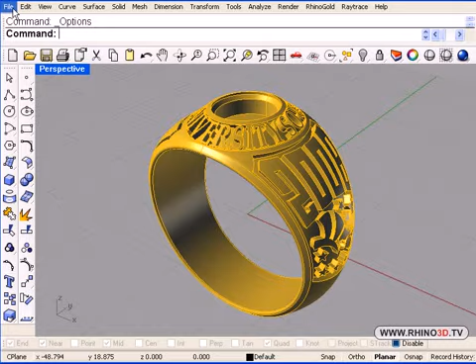Let's start a new document. Small objects, millimeters. Let's go now to Tools, Options, and set up our document with the right grid. We go to the grid option, make the grid 30 millimeters from the origin point. Minor grid lines are every 1 millimeter, major every 10 millimeters. And the snap spacing will be 0.5.

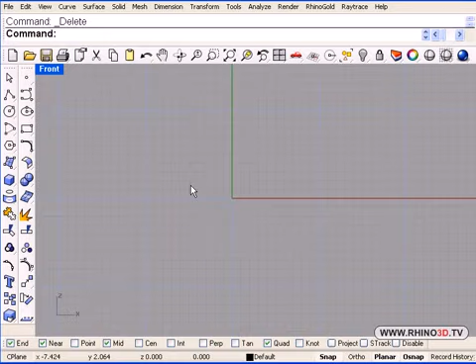Now let's go to the colors, change our major grid line to a color we can see better to define our space easier, like a light blue color. We click OK. And our grid is much easier to see now. Let's start the ring with a circle for the finger size. The circle is going to be 9 millimeters in radius.

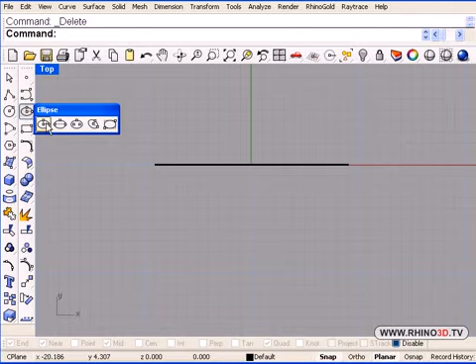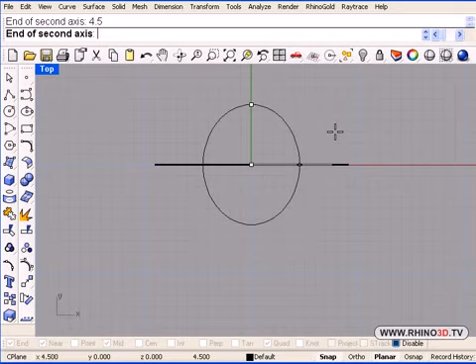Now from the top view, we're going to draw an ellipse, defining the stone shape. We'll make a 5.5 radius for the length and 4.5 radius for the width. Now let's go to the front view. In the front view, we will move this new stone shape ellipse to its correct placement.

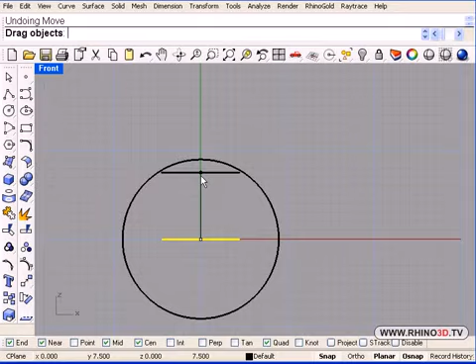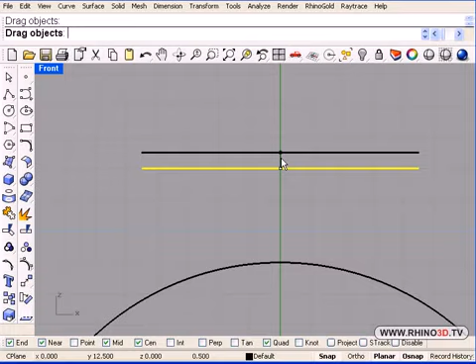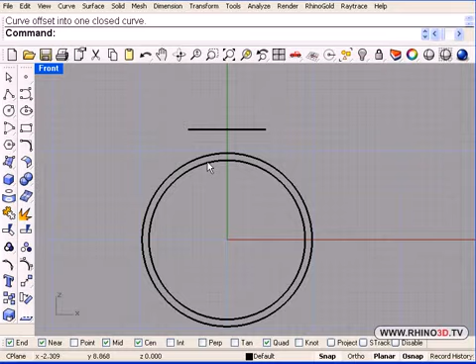Notice we're using the grid to get our measurement. Make sure to provide enough clearance for the lettering, which is probably going to be around 3 millimeters high. So you need to give yourself enough room. Move that a little higher. Now we'll take this circle, the finger size, and we're going to offset it at 0.8 millimeters. And I think we need more space here, so we'll move this up just a little bit more.

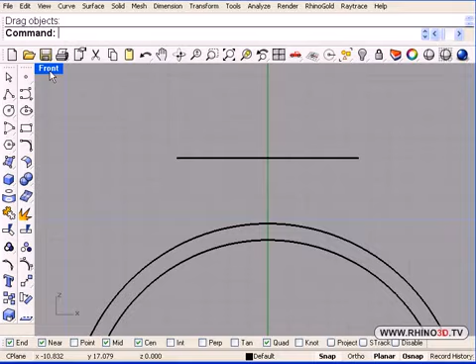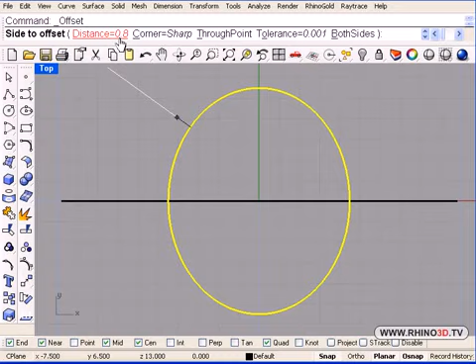We are now going to offset the ellipse to give ourselves a small rim around the stone. We're going to use 0.25 distance. We can hide this curve using our pop-up menu, hide. And we can also hide the finger size.

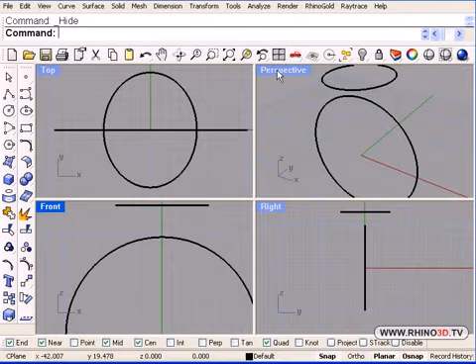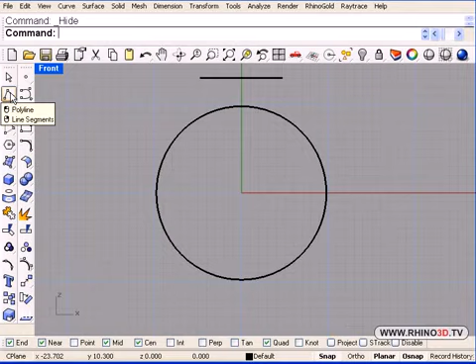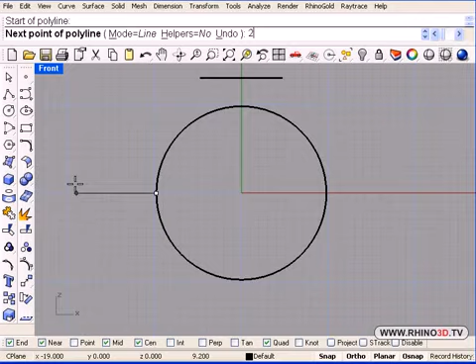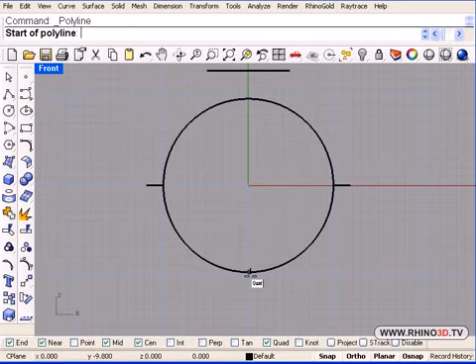Now we're going to begin to draw the shank. We'll give ourselves some guidelines from the quadrants of the circle. We'll go with 2 millimeters from the sides and 1.5 from the bottom. So using quadrant snap, we snap to this side. Make sure ortho is on. Make sure we're straight. And this is going to be 2 millimeters. We need to mirror. So we mirror that one over to the other side. So we got 2 millimeters on each side. And we place a 1.5 millimeter curve at the bottom quadrant.

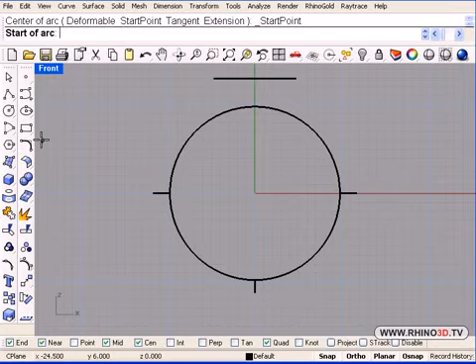Now we'll place an arc. Starts here, ends there, and point on arc right there. Notice the use of the endpoint object snap. These we don't need anymore. We'll get rid of them. So hit delete, select and delete.

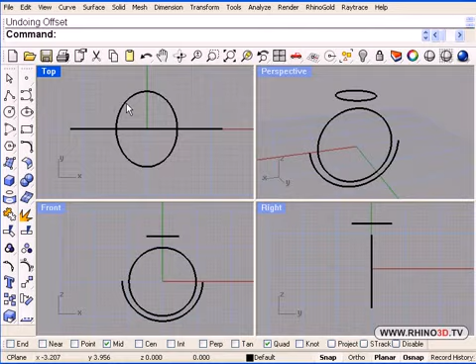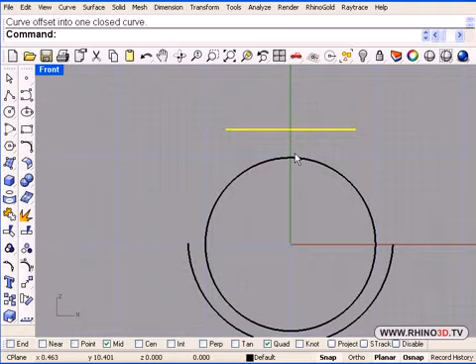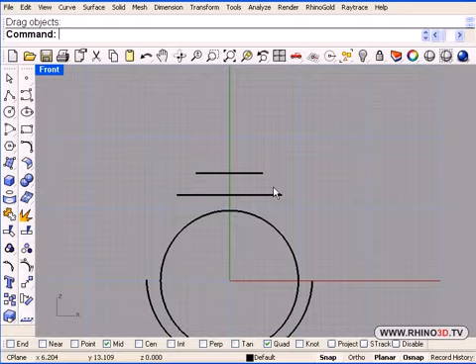Now we're going to create the outer rim of the head. So I offset at 2.75. And I'm giving myself a 2 millimeter space between the finger size circle and the bottom part of the head. Still giving myself enough room. And giving myself 3 millimeter space from the two parts of the head. Now that one, for now, we'll hide.

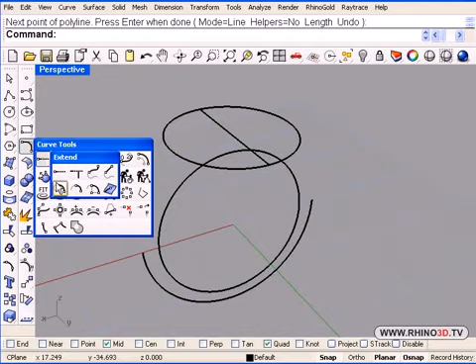I'm going to draw a straight line down the center line. Let's create a polyline from quadrant to quadrant across, snap the ellipse. And we proceed to extend by arc to point to the center midpoint. And we get rid of that line.

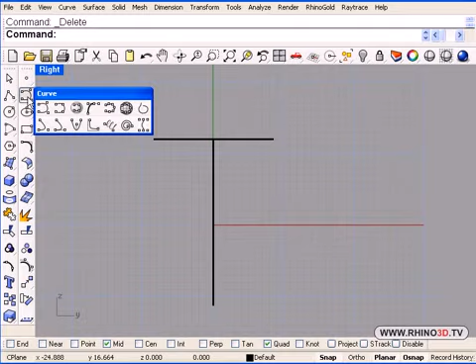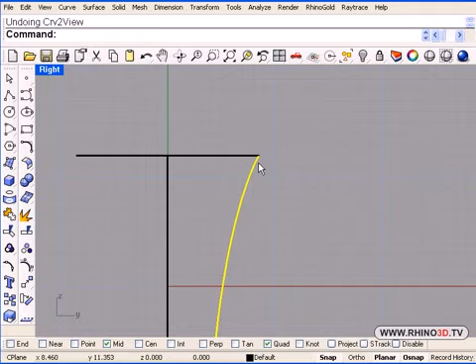Now using a conic, we're going to define the tapering of the shank of the ring. Notice we're in the right view. We need to extend this conic slightly so that it's a little longer than our ring. So we go to extend. We use 1 millimeter and we click on the endpoint. And we have an extra millimeter at top.

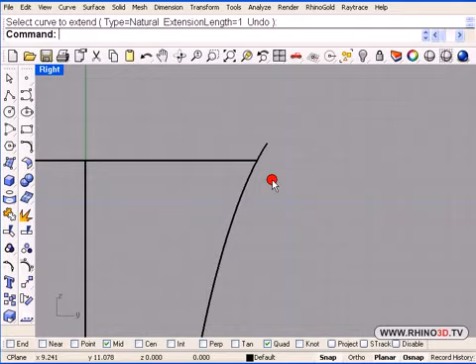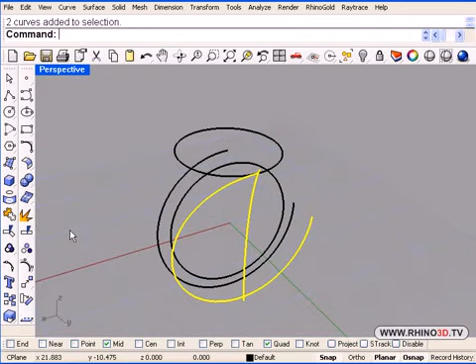Curve from two views. We now have the curve of the shank. We'll use trim. And we now have the curve that defines the shape of our shank. We need to mirror that across the red axis.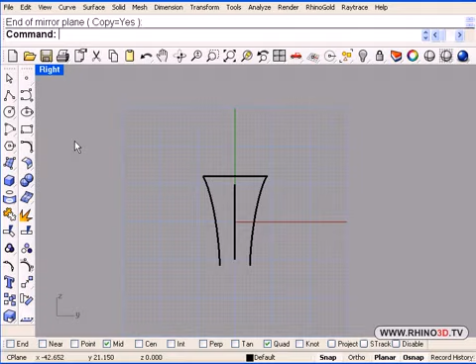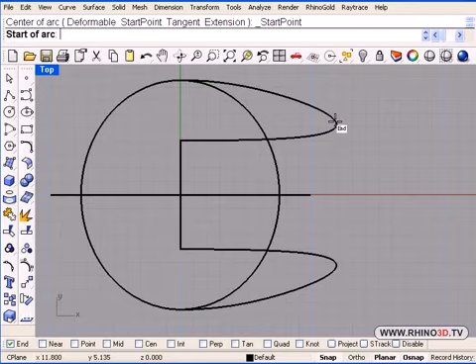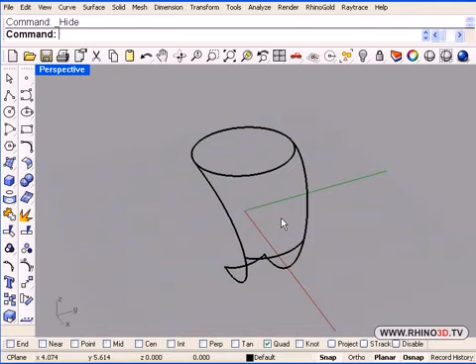Now we're going to create arcs at the ends and quadrants of our shape, making sure we use endpoint, and from here to here, something like this. Now we switch to the top view, and we want to make sure we use quadrant on this side, quadrant there, quadrant here, and something like that. Now we'll go ahead and hide the finger size. Let's trim the top ellipse. There we go.

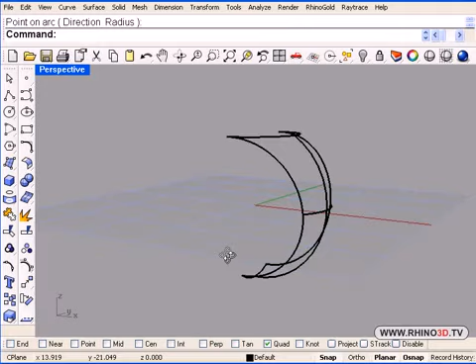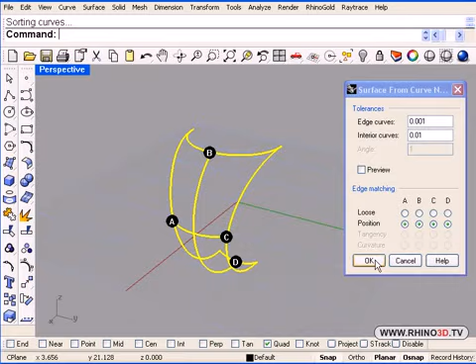And we need to create one more arc along the center. So we'll go from quadrant there to quadrant on the bottom to quadrant in the middle. And we create our surface using that network. Make sure our tolerance is correct and click OK. And I hit delete to get rid of those lines since I don't need them anymore.

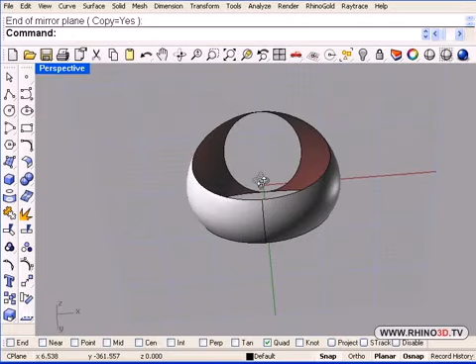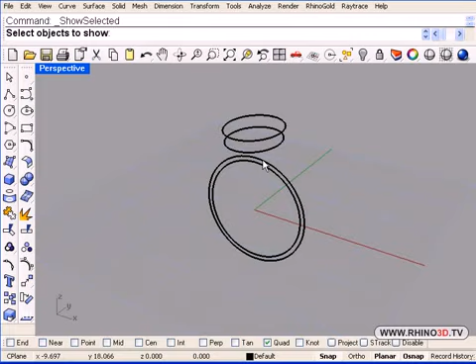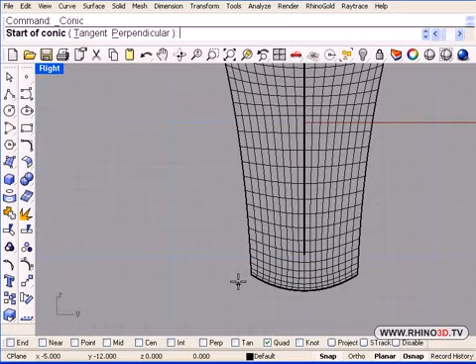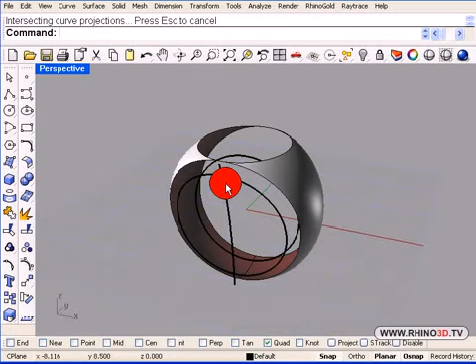And this surface can now be mirrored along the green. And they can be joined into one. And we now have the shell of the shank complete. Now let's bring back some of our other curves out here. I'm going to draw another conic, slightly on the outside, about 1 millimeter outside of the ring. And we'll use curve from two views to bring our circle out to this conic. Get rid of the conic, and we can even get rid of that one.

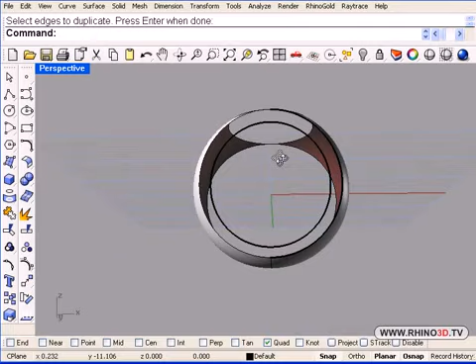Okay, now we are going to duplicate the edge right here, and we are going to use a polyline using quadrant snap. We'll create a polyline from this quadrant to this quadrant on the curve, and we'll put one at the bottom also. Now we can pick those new lines on the circle, and we'll use trim and throw away half of it.

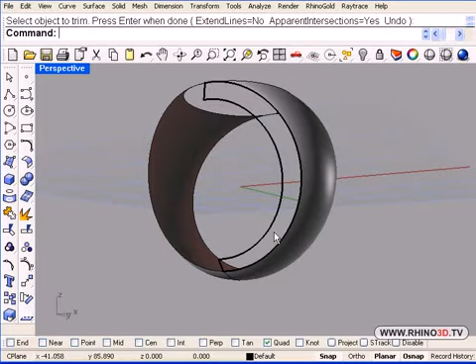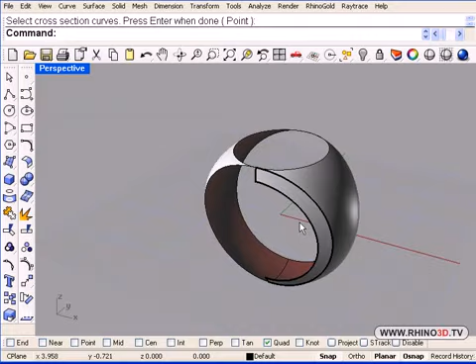And we will follow it now with creating the surface. So we go to our surfaces and we pick sweep two rails. The first rail, the second rail, cross section, enter, and OK. And here is our half little surface there. We don't need those curves anymore. We'll go ahead and select curves, delete. We pick this here and we mirror across the green, and now we mirror across the red axis.

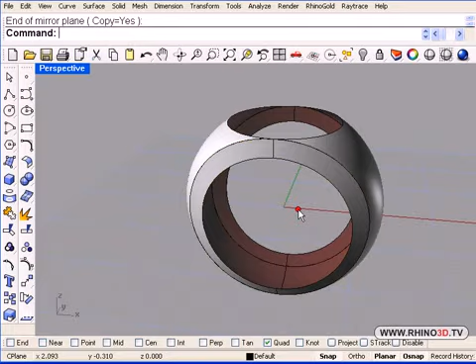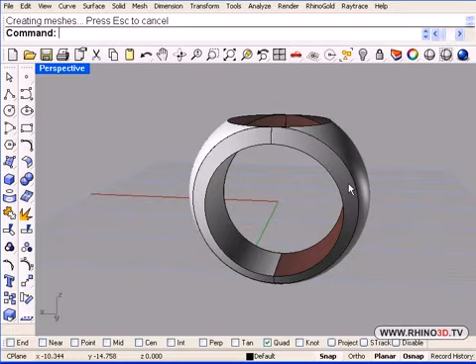Now we can loft the inside surface. From this side to that side, enter, and OK. And from this side to that side, enter, and OK. And the bottom of the ring, once we join it, is ready to go.